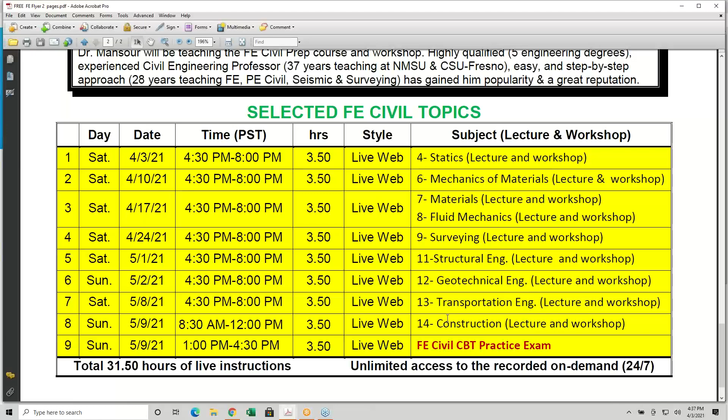Since you enrolled today with this ID, it's only one ID for all the sessions. So basically, I'm going to finish all these chapters. I finished already 4 or 5 of them, and I will ask the production company to coil these 9 chapters for me, and I will be glad to mail it to you for free. I'm not going to charge you because the course is free, so I'm going to send you the material also for free. Can I send you a PDF?

My lawyer has always advised me for the last 28 years, since I'm still teaching the PE and the FE, not to send a PDF because it can cause a problem, and it did cause a problem one time, by the way, and I don't like this to happen again. So I prefer to mail it and pay for the cost of postage instead of sending you a PDF. And this is my preference.

Okay, so let us talk about the exam, but if you can give me just 2 minutes, I will be back. I'll be back to bring the material, or make it 5 to be reasonable. Okay. The FE. Let me get the camera. I believe I lost the camera for some reason. Let me get the camera again because I need it. Let me convert this right now so I can load it on the Google Drive. Converting. Too many things, and I don't know why I made it back to back, but that's fine.

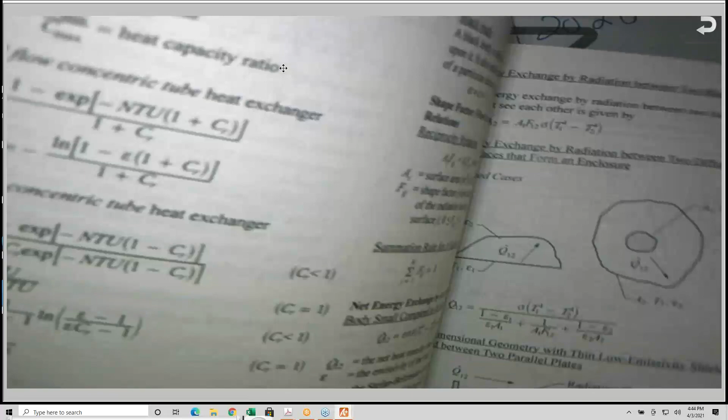The 9.5, like the previous editions, used to be 2 columns side by side. And when I started preparing my book, I said, why 2 columns? 2 columns will be difficult. Let me make my book only 1 column when I reproduce the material from their book. 1 column per page is much better, and this is what they did, which I'm glad they did.

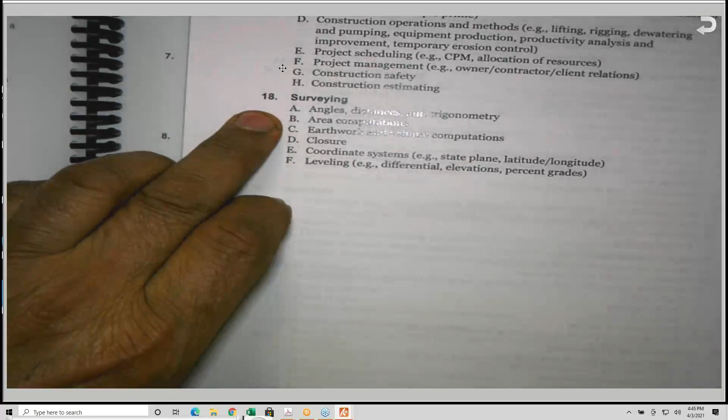So if we go to the FE civil, instead of dealing with 18 subjects as in the past, right now we are dealing with 14. But what they did, they merged them. So the FE civil, let me show it to you. In the past it used to be 18. Here it is. So the FE civil in the previous one consists of 18 sections: math, probability and statistics, and so on, all the way to the end, where the last section was surveying, section 18 or chapter 18 if you like to call it. Right now, they said, no, we're going to make it only 14, which is good.

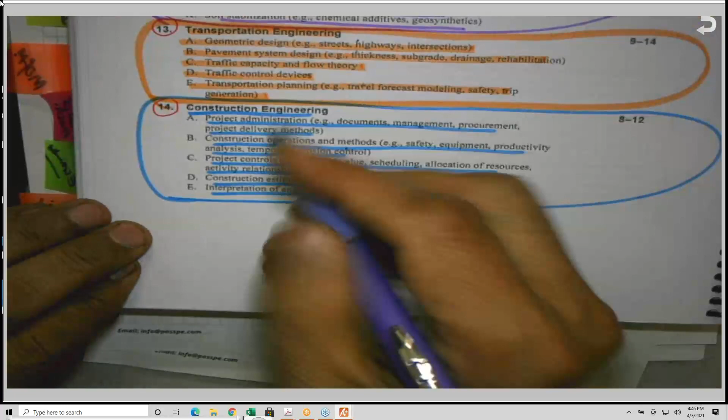So in this case, we are going to go to the civil portion, which I marked here. And this is how I arranged my book, and this is how we are going to see the material. For example, here you'll find that the first section is mathematics and statistics, from 8 to 12 problems. And they give us the topics: ethics and professional practice, engineering economics, statics, and so on, until chapter 14, the last chapter, which is construction engineering. And the previous chapters are transportation engineering, geotechnical engineering, structural engineering. So those are the topics included in the current exam specifications.

The way that I develop my books, either the PE or seismic or surveying or the FE now, I took these topics and tried to come up with very concise explanations and problems. Because I have a long history of writing these books. By the way, back in 1995, Michael Lindeburg of PPI, very famous, this was my first trial with him. It used to be EIT, Engineer in Training. So I wrote 5 chapters for him, but I wrote it the way he wanted.

Shahin Mansour, PhD, California Department of Transportation, which is Caltrans. As all of you know, I retired. Just last December, or January 1st was my first day, but I went back to Fresno State. I'm teaching seismic, and some of you may be taking the class with me right now. I was teaching timber design last semester, and I will teach it again. So I'm between Caltrans and Fresno State, back and forth, but I try to keep myself busy and help as much as I can.

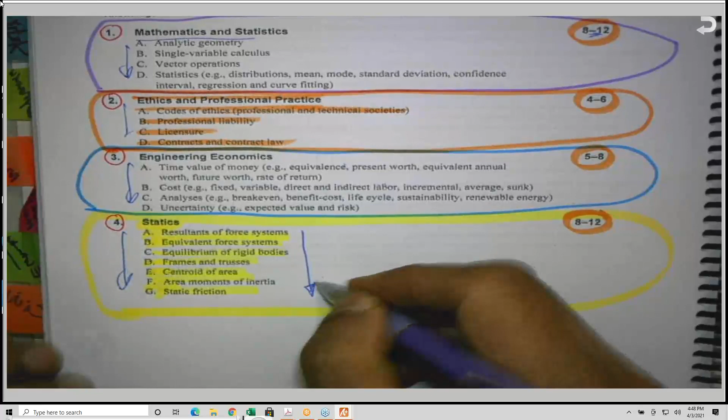So statics is the first chapter that you will see. Okay, statics, lecture and workshop. When you receive my book, or my concise version of it, you'll find only 9 chapters, or the 9 topics that we covered here. Topic number 4 — I put the order, by the way, as shown in the NCEES. This chapter 4 is statics.

I skipped it. Mechanics of materials, fluid mechanics, surveying. I skipped water resources and environmental, and I jumped onto structural engineering, geotechnical engineering, transportation engineering, and construction engineering. So these chapters are in good shape, so I said I can wrap them up. They are not final yet, but at least I can provide you with these 9 chapters in the form of a book like this, and it will be a good tool to help you prepare for the exam.

As far as the books available in the market, I'm familiar with all of them. For the last 28 years I've been doing this, so I am collecting books. I respect every book, and there are some good books available in the market. You are very welcome to purchase anything, but I will do my best to cover as much as I can.

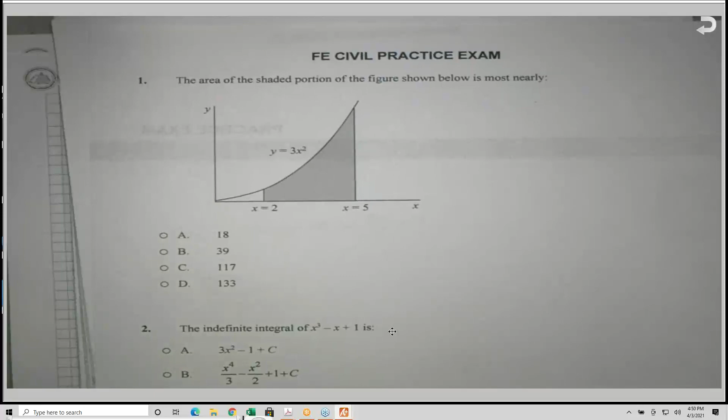For example, this is a question related to math. The area of the shaded portion is given, and they give us some sample problems, and they provide solutions at the end of this booklet. I'm using this as a guideline. For example, this is the first question related to statics, problem number 18. The magnitude in Newtons of the resultant of the three coplanar forces A, B, and C is most nearly, and they give us 4 possible answers. So this is resolving forces and the resultant and so on.

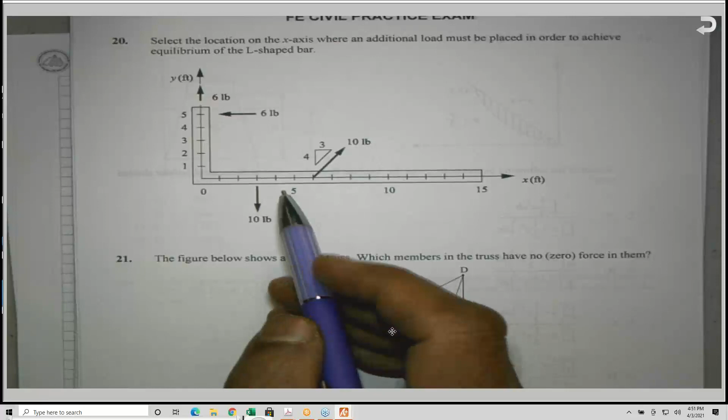If you flip the page, you will find free body diagrams. We need to know how to draw free body diagrams. The following one gives you this shape with some forces, and asks you to select the location on the x-axis where an additional load must be placed in order to achieve equilibrium of this L shape. We'll talk about that. Trusses are something very important. It asks which members in the truss have no force, which we call a zero force member. We need to know that. So this is statics.

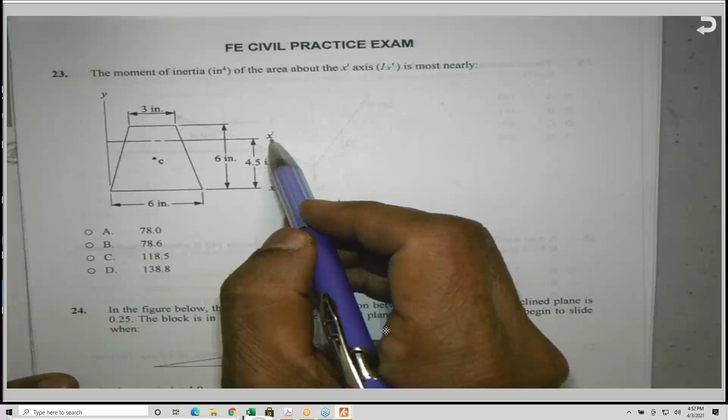If you flip the page, you will find the centroid. For this given shaded area, we need to look at the centroid: which expression gives the distance from the y-axis to the centroid. They give you the expression, and we need to know that. If you go to the second question, you will find the moment of inertia, or the second moment of area as we sometimes call it, of this area about the x prime axis is most nearly.

You will find that the x prime is parallel to the x axis, and there is a little dot here, and this is C. C stands for centroid, as you know, and we need to get the moment of inertia about x prime. We are going to use what is called the parallel axis theorem, so we need to know how to apply that. Friction, another section. So this is a statics problem.

If you flip the page, you will find that we have 3 forces, and it asks the magnitude of the resultant of these 3 forces. Up to here, question number 25, this is the end of the statics section. After that, they talk about dynamics and

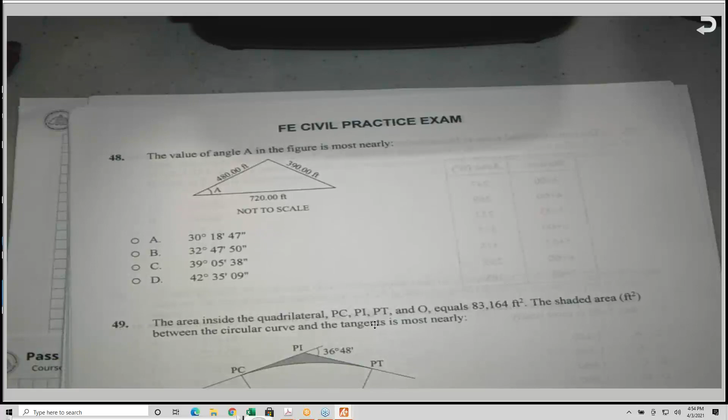steel, mechanics of materials, hydraulics and fluid mechanics, transportation: horizontal circular curve, radius, point of curvature, point of tangency, and PI, the point of intersection. Area: we're supposed to know how to do the area using 3 methods. We'll talk about that.

Prismoidal method, I just talked about it a few minutes ago. There is one method called the prismoidal. So when you read question number 50, for example, or whatever the number of the question on the actual exam, this will be on the right-hand side of the screen, and you need to do the calculations, and you pick the answer by clicking on the answer.

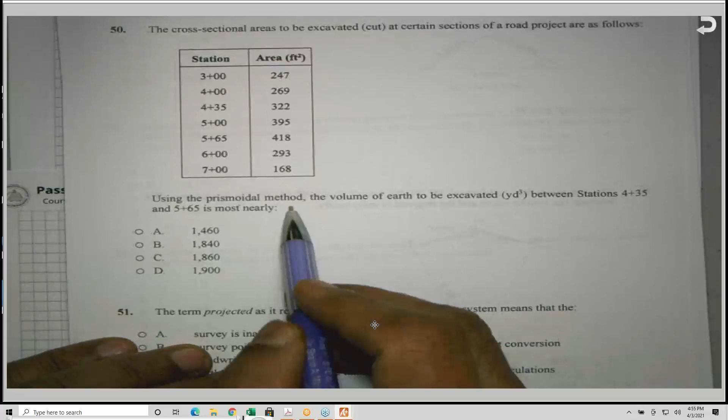So the cross-sectional areas to be excavated at certain sections of a road project are given, and it is asking, using the prismoidal method, the volume of earth to be excavated between station 435 and 565. So here is 435, where the area is given, and 565, most nearly. Here he specified a method. In this case, I have to use this method.

Your job will be this book, which is the FE Reference Handbook, which is, as I told you, available as a PDF. You can download it. But this book is for everybody, for mechanical and for civil, industrial, name it. You should know how to search for the prismoidal. And you should go to the equation, because you cannot memorize all the equations or the tables, the charts. But if I know where it is, I will be very quick.

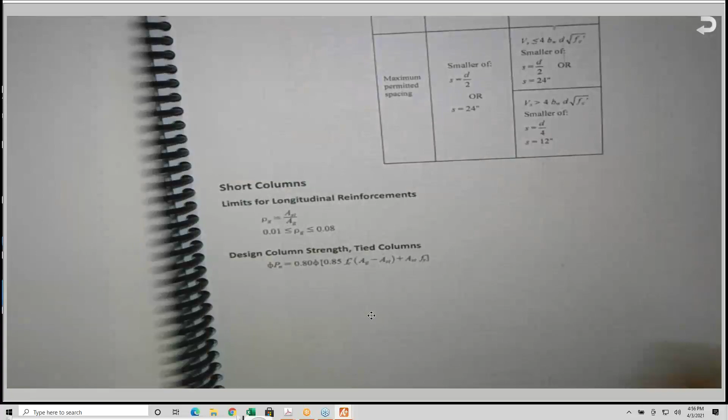So if you go to civil engineering, you will find that it starts, according to their book, with geotechnical. You will find that on page 258 and so on. And if you go to the transportation section, you will find there is one equation about the prismoidal, how to get the volume of the earthwork using the prismoidal. And let me see, I'm searching by hand, not searching by the PDF. Okay, this is water resources.

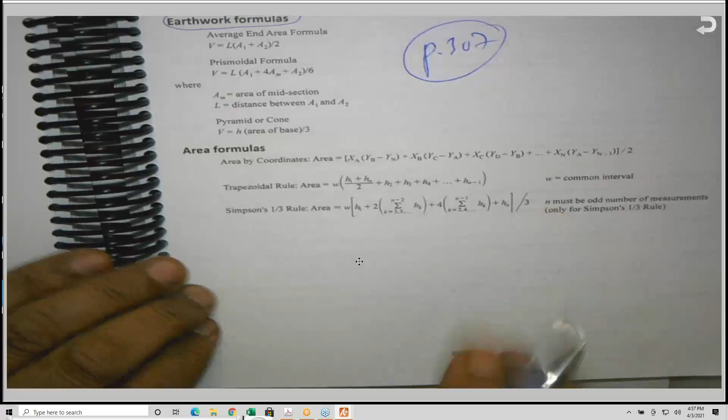Okay, and this is the horizontal and vertical curves, and the volume, it must be somewhere here, traffic safety, and earthwork formulas. This is on page 307, by the way, of this book. And here is the prismoidal formula. The volume is equal to L over 6 times (A1 plus 4 Am plus A2).

I was just covering this, by the way, for the civil breadth in chapter 8 of my book. You will find that the equations are the same. We're not going to reinvent the equations, but I put it in a tabulated form like this with some kind of illustration. Here it is: volume, prismoidal formula. The volume is equal to (A1 plus 4 Am plus A2) L over 6, and the 27 to convert cubic feet into cubic yards.

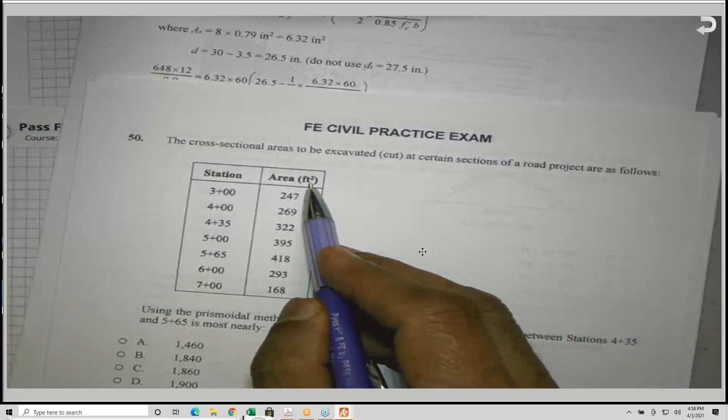Units are very, very important. In this question the area is given in square feet, but he needs the volume in cubic yards. So you have to divide by 27. That's why I included the 27, because there are 27 cubic feet in 1 cubic yard, as all of us know. And at the beginning of this book, it has some units and conversions, and we'll talk about this because we need to know that.

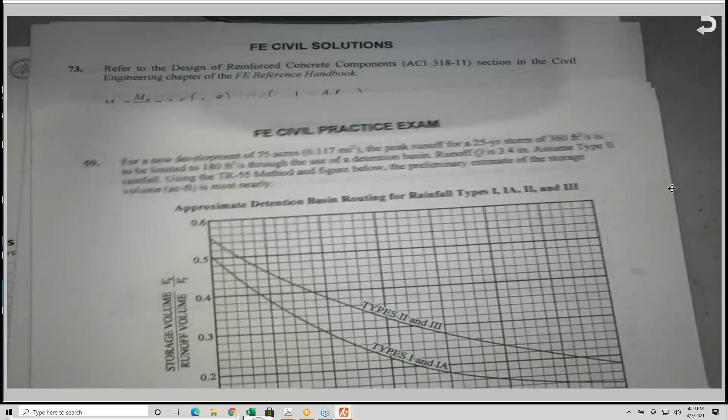So the point is, the moment you read a question, you should search for the keyword that will give you the equation, because you cannot remember every single equation, and we'll go over this. After that, we have some questions on surveying. This is hydraulics, pipes and flow. We have something like this, and it is asking the storage volume. And we are going to see how we can use this. Q is given or calculated. We are using something called the rational method, or another method specified, which is Q equals CIA.

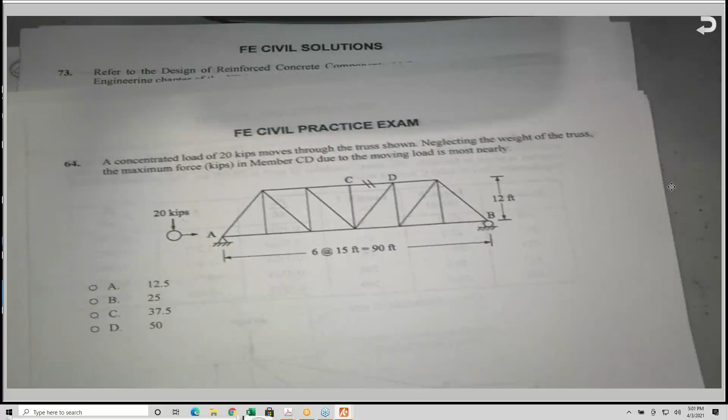We have one equation, we're going to see it. And you are lucky that he gave you all the parameters. You are not going to start it from scratch. And we will know that.

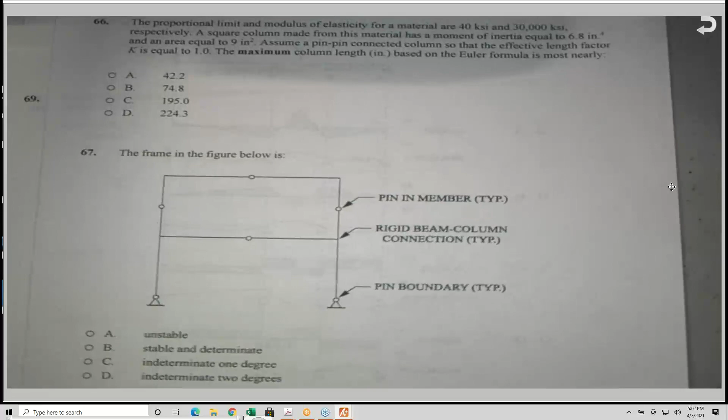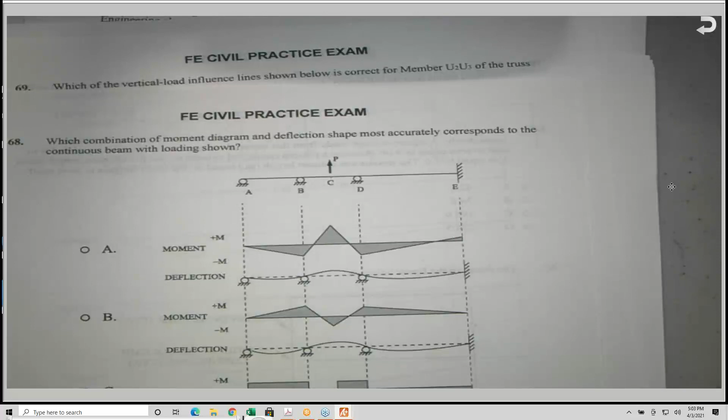And deflection calculations we will go over it. We need to select the proper answer if we know how to draw the influence line for a statically indeterminate beam, because this will give us a deflection. And the moment diagram, also we need to know how to draw the moment diagram.

This is another truss problem. Problem number 69 gives you a truss, and asks which of the vertical load influence lines shown is the one for member U2, U3. We'll talk about that. He gave you different influence lines, and we will see that.

Concrete beams, steel, this is a steel beam. This is a concrete beam, CE132. This is CE133, this is CE130 for those who took the class here at CSU Fresno. I taught this class for many, many years.

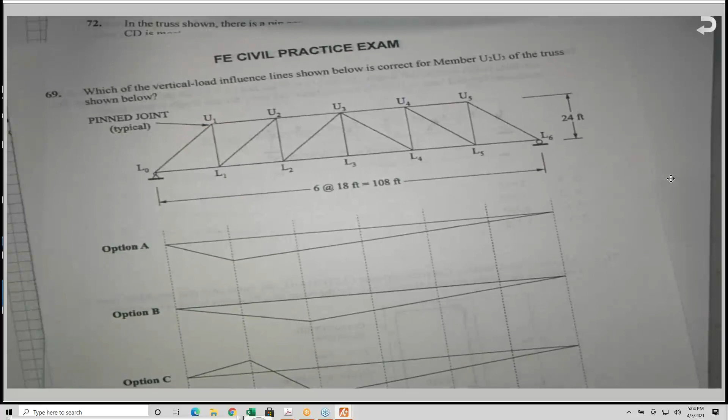Unfortunately, it is a very compacted class, not a fair class, but what can I do? I suggested something to Dr. Lalarde when he was the chairman, and I told him this class should be broken down into 2 classes at least, or 3: statically determinate, indeterminate 1, indeterminate 2. But nobody is willing to listen to me for some reason. I don't know, because I am Egyptian probably.

We need to know how to analyze trusses using the method of joints, method of sections, or the third method, which is called the cut and sum method. And I will teach that, and you will never forget it, okay? If you look at another concrete problem, okay, we need to know that.

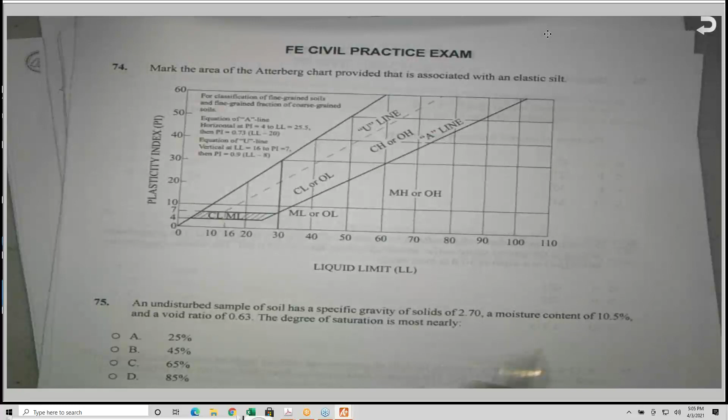Geotechnical or soil mechanics. Do you remember this chart called Atterberg? Professor Atterberg, he is a Swedish scientist, he came up with this chart. It's called the plasticity chart. Liquid limit and plastic limit, and the PI, which is the plasticity index. We will know how to use it.

A lot of problems, some of them conceptual questions, some of them have a drawing, some of them they don't. This is a vertical curve. Okay, a highway profile is shown.

G1 is given and G2 is given. This is a point of vertical curvature. This is a point of vertical intersection. This is a point of vertical tangency. G1 and G2, and we're asking, the minimum design length of the curve is most nearly. L is not given.

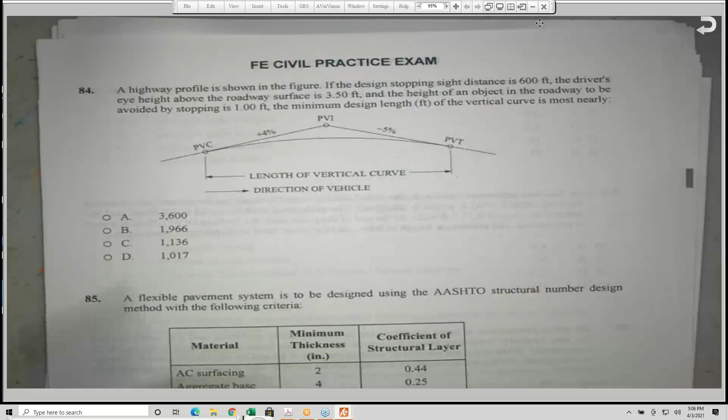Asking about the sight distance. The driver eye height is 3.5 feet, and the object is 1 foot. So if I'm driving and there is a mattress here on the road, 1 foot. AASHTO uses 2 feet, and I will explain this to you.

But we do have an equation for the stopping sight distance. I should come to a complete stop before I hit the mattress, or I hit the tire, or whatever object is on the road. So it's saying, what is the length of this curve to give me ample distance to come to this stopping sight distance, which is called SSD, by the way.

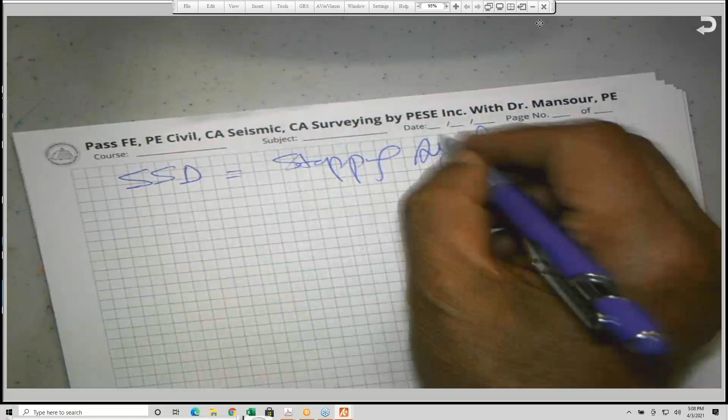SSD, SSD, we're going to see it twice. We use it as a stopping sight distance. Stopping sight distance. And we use it also,

which we'll cover here also, when we are talking about concrete. I believe they used to have a problem in concrete here, which is SSD. It stands for saturated and surface dry condition. A lot of abbreviations and a lot of notes. You'll get familiar with all these things.

AASHTO and CPI, all these things, we'll talk about all these things. Believe me, you will have a lot of fun. And engineering economics, for example.

The way that I'm going to teach this class, as I told you, we'll start with statics today.

I was planning to email you the PDF, but even my lawyer told me don't email any PDF. So probably I will listen to him, because I don't like to be in trouble again by somebody taking my PDF and doing something with it that causes a headache. So I will show you exactly what I did.

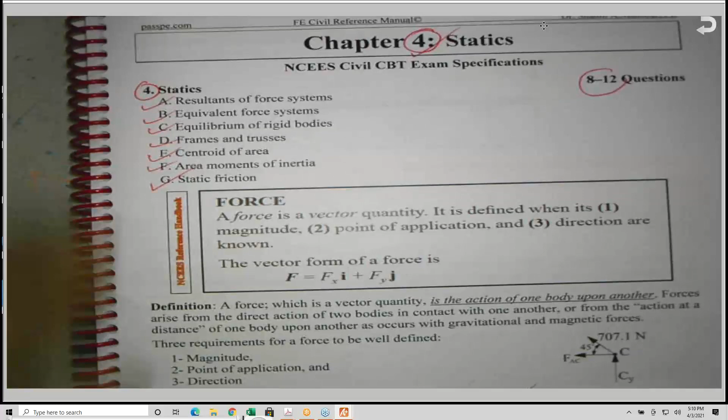I believe I have a first print here. For example, this is what you receive, 9 chapters in this format. So what I did, for example with chapter 4, which is statics, here are the topics. I copied this verbatim from the NCEES.

If you go to statics, let me see if I can locate it. Here it is, statics. Let me go to the description first, and after that I will go to this chapter. Here it is, the exam specifications as given in the NCEES. You will find that we have A, B, C, D, E, F, and G.

A, for example, is resultants of force systems, equivalent force systems, equilibrium of rigid bodies, frames and trusses, centroid, area moment of inertia, and static friction. Those are A through G, and I copied them.

And the number of possible questions on the exam, they put it between 8 and 12. So what I did, I went to their equations and topics, and I took one at a time.

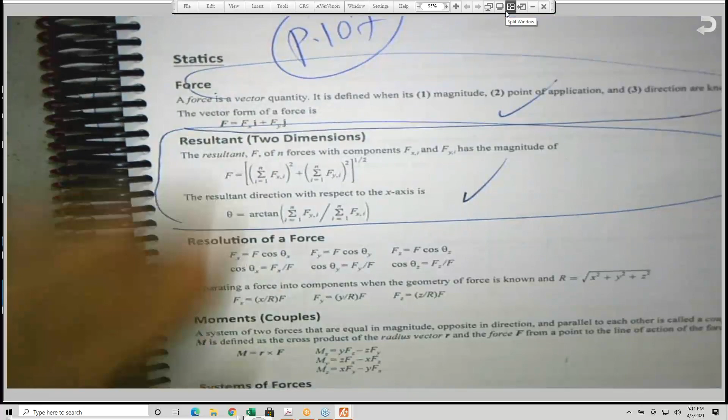For example, statics, here it is on page 107 if you have the book, by the way. Use the new book, which is the 10.0 — as I told you, this is the latest print.

So what I did, I took each one of these, because this is what you'll see on the exam. You are not going to see anything else. No other books can be taken to the exam site.

You're going to see this as a PDF on the left side of the screen. And if you have a question related to statics, you need to go to this page, searching for whatever I need. For example, if it's asking for the resultant, you have to search for resultant. It will take you to this page, because all these equations are listed there.

So I took each one of these, talked about it briefly, and provided problems. Because problems are like learning to swim — as I tell people, if you give me a couple of books about swimming with a lot of illustrations, telling me raise your left hand, raise your head above the water, name all these techniques, it doesn't matter how many books or videos I watch. If I don't jump into the swimming pool, I will never learn how to swim.

And this is the key here. In order to pass this exam, nothing is impossible. The passing rate is very high, and you can pass, because the people before me passed, I passed, and the engineers who came after me passed. It's just a matter of how many hours you are willing to put in. Nothing is for free — you have to study, sit and make mistakes, and solve problems. You should understand the concept very well.

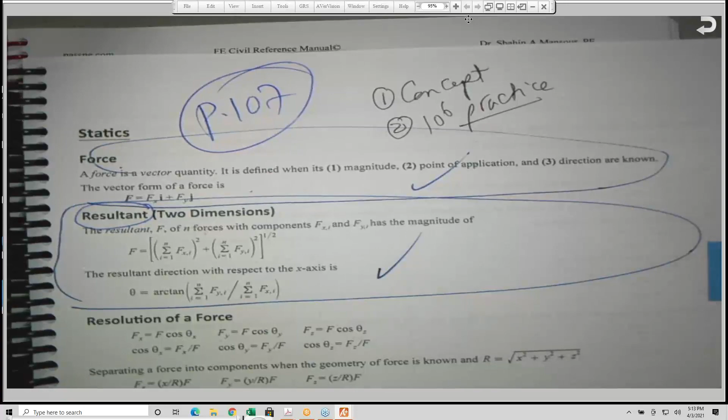Number 3, you must go to the exam with a strategy. Those are the 3 components I normally address.

For example, in the NCEES book, the practice exam has 110 questions. Some of them you can solve in 20 seconds. For example, look at question number 100 — they only provide 100 here, by the way. You will find it's asking a very simple question.

If you understand question number 100 — it gives you a drawing of a roadway cross section shown below, and asks what the arrow with a number indicates. Does this arrow and number indicate the thickness of the surface coating, the slope of the road at 3 inches per 10 feet across the slope, or that the edge of the roadway will receive a chamfer of a quarter inch, or a groove — if you understand how to draw cross sections and the difference between a cross slope and a slope.

You should answer it in 20 seconds. And we will learn that when we come to transportation and geometrics of the transportation.

So I would solve this problem, if I understand the subject very well, in 20 seconds. But if you go to a problem like this, the concrete problem...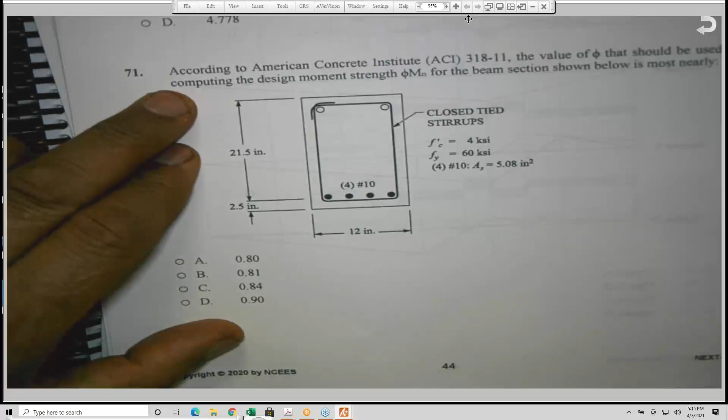Here it is, using the ACI code, the one we use, by the way - they are using an old one, I don't know why. The ACI code right now we have 2018, but currently we are using ACI 318 2014, but they're still using the old one, though they give you the equations anyhow, so it doesn't matter. Like the HCM, the Highway Capacity Manual, they are using an old one for some reason, I have no idea why, but it's not my problem or your problem. It is up to them, whatever references they are citing, we are going to follow them.

ACI, the value of phi that should be used in computing the moment phi M sub n - they give you some parameters here, the f sub c prime, f sub y, the dimensions, and the 4 number 10 bars. Probably it will take more time than the problem 100, the one I showed you, cross slope.

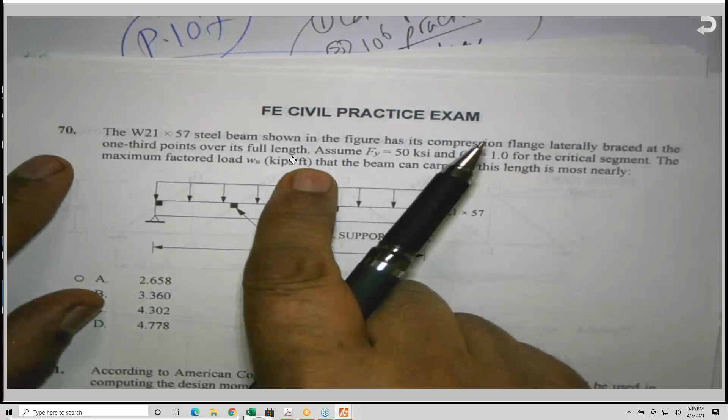So you have to be selective. For example, the problem on the same page, number 70, this is in the steel manual. Steel beam, F sub y is given, C sub b is given, and then it asks you - I need to go and look at some charts in order to be able to solve this problem.

So you have to be selective because you need to pass. I don't like to go to my wife and tell her, oh my God, my wife, I solved the most difficult problem in the exam. Yes honey, but you spent 15 minutes - you could've solved 3 or 4 other questions.

So you have to be, and this is based on your practice. If you practice enough - which I will say a million times, practice and practice, this is the key, the most important key among these 3 elements - you will be able to decide, oh, this problem will take too long, because you have 110 questions and 5.5 hours.

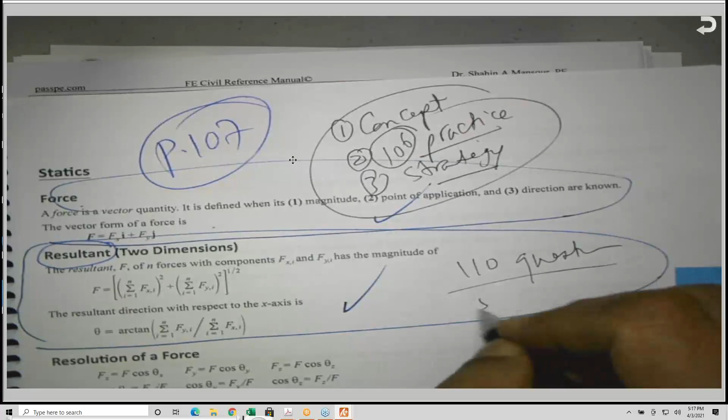So please do your best and I will do my best.

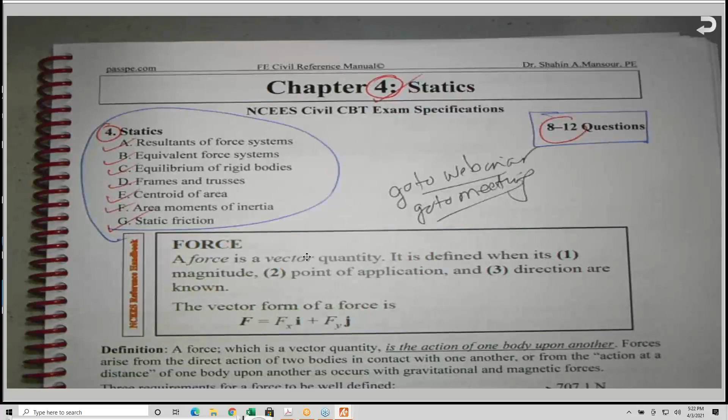The webinar company, because I'm using something called GoToWebinar and GoToMeeting. It's a very good company, GoToMeeting, okay? In fact, I'm using it also for my seismic and timber class, I was using this before Zoom was even invented. I prefer to use them and pay the money for that. I told the school I'm willing to pay, and I'm using my system. It's much easier, I like it, and it's very powerful compared to the others, from my point of view, okay? So anyhow, you are very welcome to attend or not to attend.

This is your decision. So you are very welcome to raise your hand. You have a control panel in front of you. You can raise your hand. The moment you raise your hand, I will be able to see your hand and who wants to talk, and I can allow you to speak out. When you speak out, everybody will hear you. So you have to be careful, okay?

So if you don't have a mic, or we have a problem with the audio, you are very welcome to write a question in the question area. For example, one of you wrote a question. Let me read the question first, okay? This is a very good class. You are very welcome. Thank you very much. Okay, but somebody is raising the hand. Let me see who is raising the hand. Let us go to Badr.

Hi, Badr. How are you? Hello, doctor. How are you? I'm fine. You are in New York or New Jersey? Is this correct? New Jersey. Yeah. How is the weather over there today? It's cold somehow. Cold. Do you have snow? No. Okay, good. So now you can study without snow. No problem.

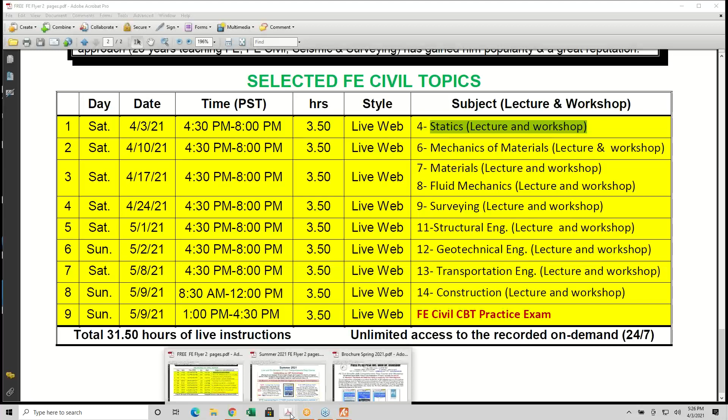So look at the material that you will receive from me, how I arranged it and prepared it and how we are going to handle this. And you are very welcome to email me with any question. I will do my best. I am extremely busy, this is my biggest problem, but it's not your problem, it's my problem. Let me just have a sip of water because I've been talking since 8:30 this morning for the PE.

So as I told you, this is what I took from the NCEES, and I put something here to indicate that. If you go to the NCEES, you will see this. This is the actual document. Force. A force is a vector quantity. It is defined when its magnitude, point of application, and direction are known. The vector form of a force is given as F = Fx i + Fy j.

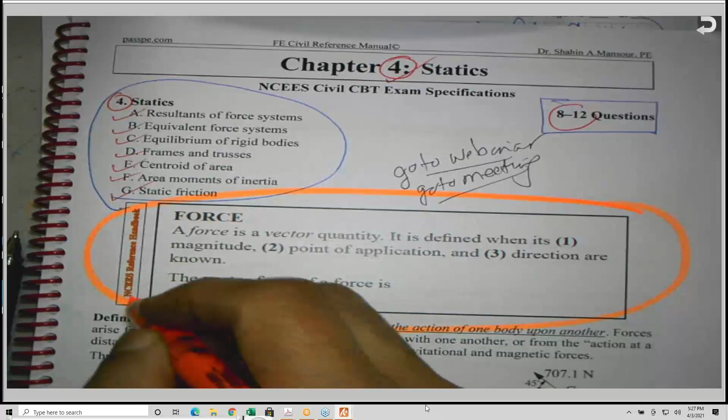This is the first paragraph I took from the NCEES and I put it in a box. This is what you will see on the exam. I tried to make it a little bigger, and I indicated on the side that this is from the NCEES FE Reference Handbook, verbatim, I did not change it. So this is not my Egyptian English. A force is a vector quantity, defined when its magnitude, point of application, and direction are known. My job right now is to translate this English into English.

What is a force? A force, which is a vector quantity, is defined as the action of one body on another. So I tried to clarify the definition. Right now, this is a book supported by a table. If I push this book down by my hand, I am applying a force. This is the action of one body on another body.

And a little bit more: three requirements are required. Magnitude, point of application, direction. The same three things mentioned here, 1, 2, 3. This is the situation in figure 4.1. I have 707 Newtons at 45 degrees. I have a force. I have a reaction. These three forces are meeting at a common point.

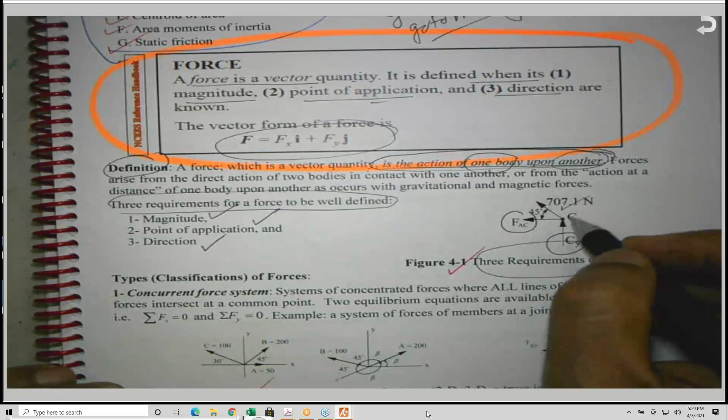This kind of force system has a name. You cover this in CE20, for those who took the class, I taught CE20 I don't know how many times, or whatever numbering system in your school. Let us talk about forces and classify them. The types of forces. The first one is the concurrent force system.

What's a concurrent force system? A system of forces meeting at a common point, like this, or this, or a 3D. This is a 2D; 2D means two-dimensional, X and Y. For 3D, I add Z: X, Y and Z. This we call a concurrent force system. The definition: systems of concentrated forces where the lines of action of all forces intersect at a common point. And I give you examples.

Where we are using the sum of the forces in the X direction and sum of the forces in the Y direction must be equal 0. This is one of the equilibrium equations, and this is another equilibrium equation. And you will say that, wait a second, equilibrium equations are 3.

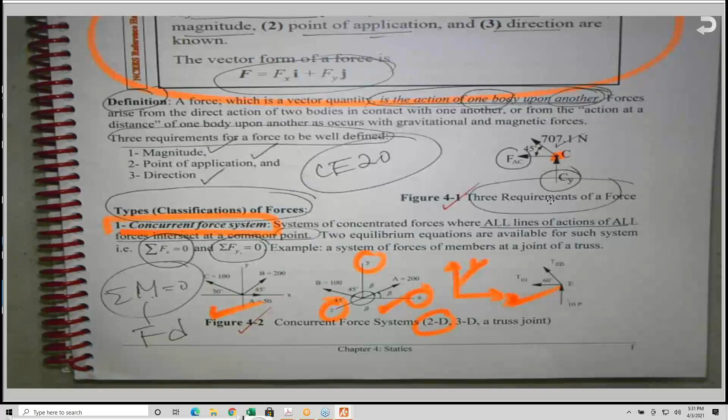So this is why, if you look at this, for a 2D system in the NCEES, as I put here, they are putting I and J. What happened to the K? Because if you remember, this is X, this is Y, and this is Z. They assign a unit vector, they call it I. And a unit vector, call it J. And a unit vector, call it K. I is along the X, J along the Y, K along the Z.

This is the notation that your grandfather and my grandfather agreed upon. Don't change it, please. I cannot say K will go with X now, because your grandfather will be really upset and my grandfather will be extremely upset. This is the standard notation. And as you can see, this I is boldface. Why? Because this is a vector quantity, not a scalar quantity.

In textbooks, there are 2 ways to express a vector. Either make it boldface like this, or put an arrow on top of it to indicate that this is a vector quantity. They found the boldface is much easier instead of putting an arrow, because quantities are either scalar quantities or vector quantities. Any quantity we use in our life is either scalar or vector. So for the vector quantity, we put an arrow on top of it, or make it boldface like I just mentioned. And this is what they did here, by the way.

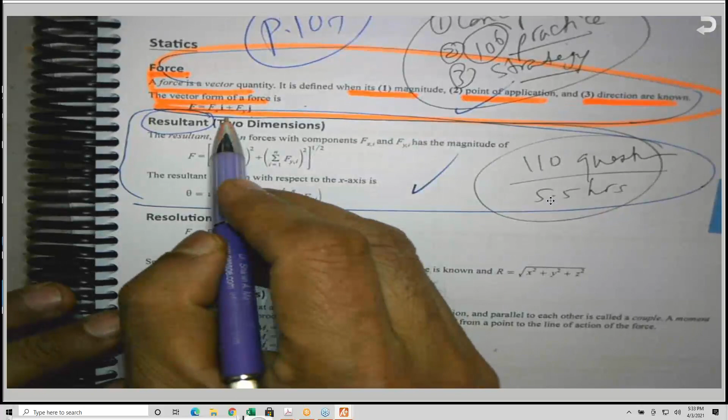You can see in the original document, this is the NCEES. I hope that all of you can print it, but this book is too thick. How many pages is it? It is 494. Obviously, printing it is costly. If you purchase it, I believe the NCEES sells it for $25 or 30, but you have to pay shipping and handling and wait for it. Or you can print only selected topics. If you can print only the selected topics, this will be the best.

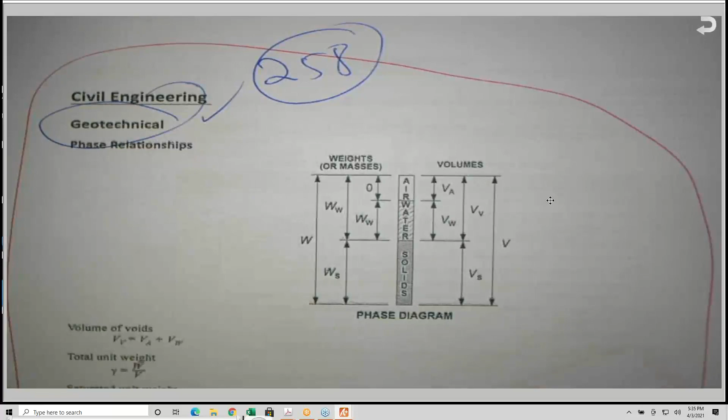What topics do you need to print? The 14 topics listed under the civil section, not in the civil section. For example, statics is not in the civil. Civil is all the way at the end here, starting on page 258. I can send you an email telling you what pages you need to print. They group them, mechanical and industrial, to make it easy. But some subjects are for everybody: engineering mathematics, engineering economy, material science, name it.

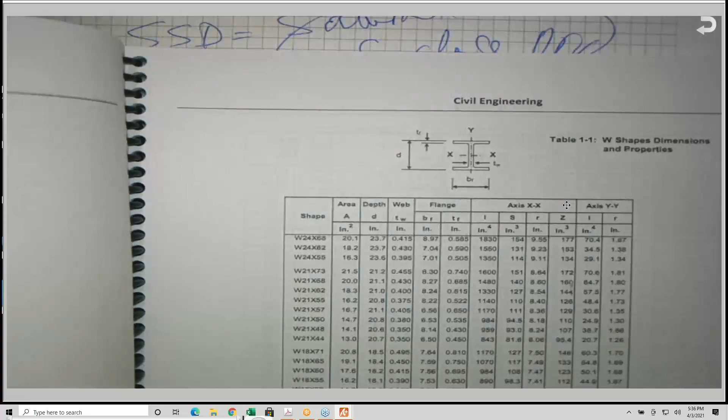Dynamics and statics depend on your discipline, but for civil engineering they put all the subjects only required for civil, like geotechnical, which is a very large section, and soil classification. After that, you will find structural analysis on page 267, and after that, structural design, concrete and steel, transportation, water, hydraulics and hydrology, until latitude and departures.

Environmental engineering is different; we're not covering environment. The civil section ends on page 308 with construction, which, if you remember, was chapter 14. I have 3 books on construction for the PE, but this is a very simple and concise section, and we will go over it. For example, AASHTO equations for pavement design. Here it is, highway pavement design.

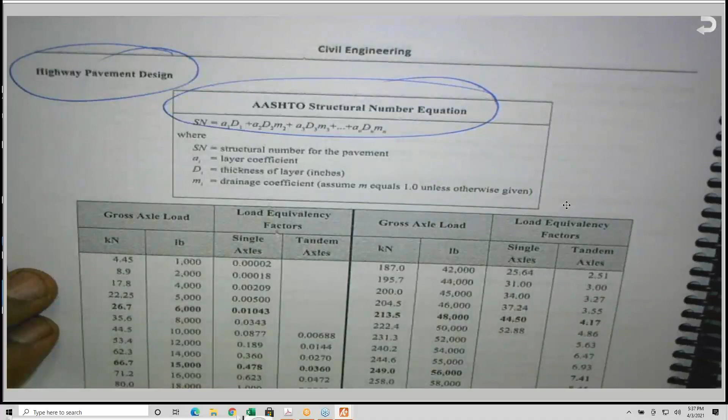And we have something that's called LEF. They produce the LEF for you. Load equivalency factor, and we will know that. For those who took CE 150 and 151, they know that. Anyhow, so you don't have to print the entire book, okay?

In my book, you will find that what you need from the NCEES is here, but it's not complete yet, okay? You will get the 9 chapters first, but for those who are going to take the exam soon, you need to download the entire book, because you need to know what is in the NCEES reference book. Because if you don't know the equations and the tables and the charts and how to use them and where they are located, it will be very difficult to pass.

Because you don't have any other sources or any material that you are allowed to take with you to the exam. And I'm sure that you are familiar with all this. I'm just saying this for some of you who are new and did not go through this process. So I need to make everybody aware of this.

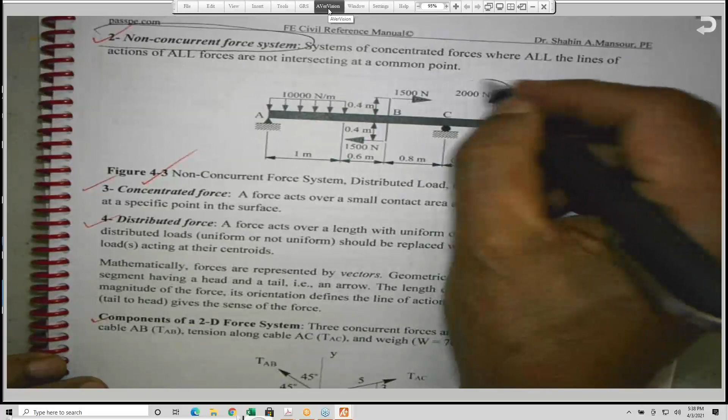Going back to the concurrent force system. So if you flip the page, you will find that I have the second group, non-concurrent force systems. I have a concentrated load here. I have 2 forces of equal magnitude, opposite direction. I have a distributed load, concentrated load. So they are not meeting at a common point. This load is going to be substituted by a single load here. This will be a moment, another load here, reactions, name it.

So here, the 3 available equations: sigma force X equals 0, sigma force Y equals 0, sigma moment equals 0. All 3 equilibrium equations for 2D. Is this 2D? How do I know that? Here it is in the plane of the paper, X and Y. So this is a non-concurrent force system: distributed load, concentrated and couple.

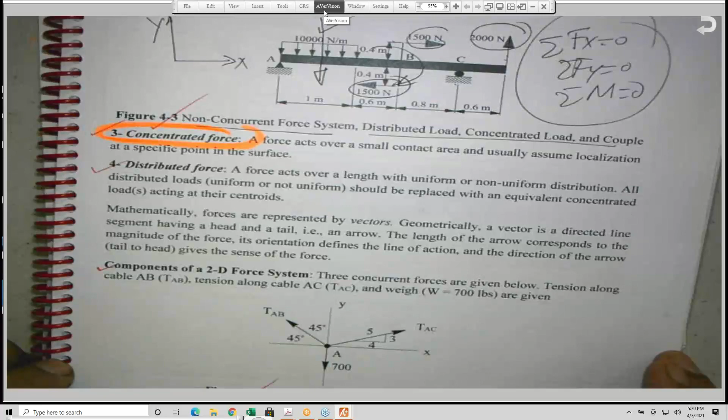The third category, concentrated forces. Forces could be concentrated or distributed. The concentrated one, we assume it to be acting over a point. A force acting over a small contact area, and we usually assume it to be a point, like the tire of your car. When we analyze the tire and the load coming to the pavement, I know there is a contact surface between the tire and the pavement, but for simplicity, we make it a concentrated load acting over a point.

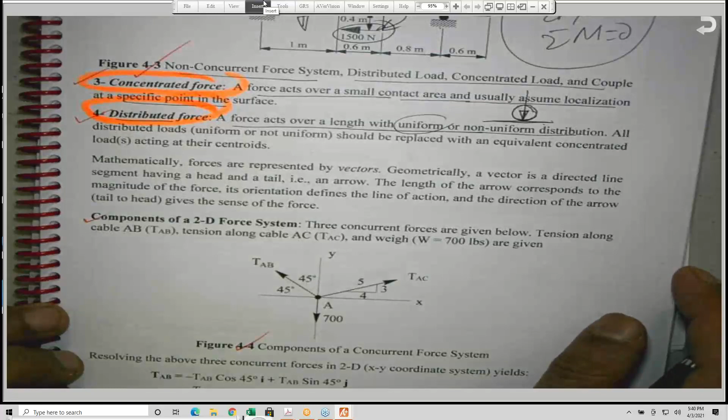But this is a distributed load, the second type. It is a force acting over a length, either uniform or non-uniform. We are going to see this in just a minute. So how can we resolve or handle a 2D system? So this is X and Y, so this is 2D. I give you a force here, or a tension here, and this is a 2D system, XY. And this is a concurrent force system, by the way, a concurrent force system in 2D.

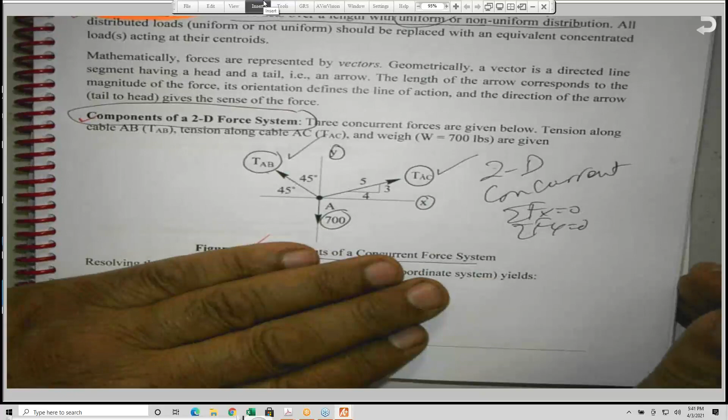How many unknowns here? I have the tension along AC and the tension along AB. How many available equations? This is 2D, and it is concurrent. How many available equations, do you remember? Sigma force X equals 0 and sigma force Y equals 0. The moment equation does not exist. Can I solve it? I look at the number of unknowns and the number of available equations.

If the number of unknowns and the number of available equations are equal, I can solve it. It's called statically determinate. And I need you to know that, and we are going to see this. So systems are either statically determinate, where the number of unknowns equals the number of equilibrium equations. Plus, by the way, we have something called conditional equations, and we are going to talk about this later on.

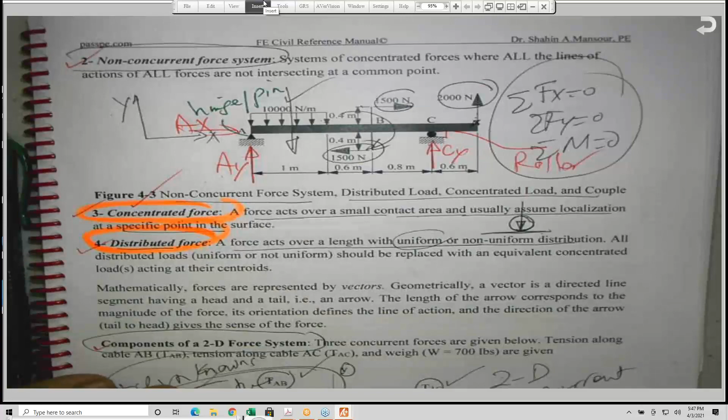How many available equations? This is a 2D system. I have 1, 2, 3. The number of unknowns equals the number of available equations, so it is a solvable system, it is statically determinate. And we are going to solve this. The other group is statically indeterminate.

I have a cantilever beam like this. And this cantilever beam is carrying, for example, a concentrated load P of 10 kips. And it has L of 8 feet, for example. This beam here, as is right now, is statically determinate. Why? Because the fixed end has 3 unknowns. If this is A and this is B, I have A sub y, A sub x, and the moment at A. How many unknowns? 1, 2, 3. Is this 2D? Yes. How many available equations? 3.

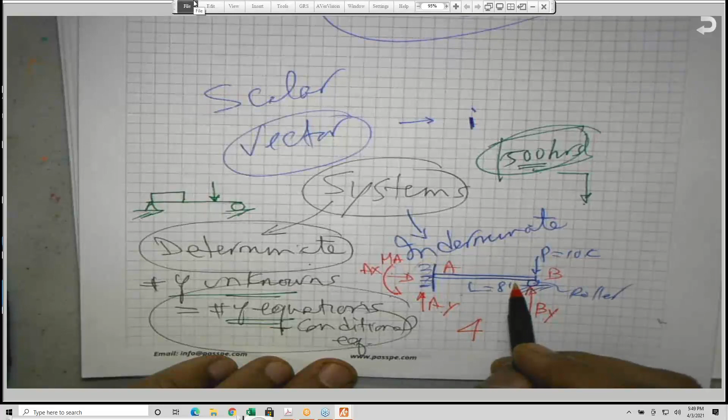But if I come and add another support here, a roller support, what will happen? Now by putting this, I am generating another reaction, which is B sub y. So the number of unknowns, my friend, changed. 1, 2, 3, 4. Some of them could be 0, but still they are unknowns. So 4 unknowns. How many available equations? It's still 2D, 3 equations.

So this system is called statically indeterminate to the first degree. The degree of indeterminacy is the difference between the number of unknowns and the number of available equations. 4 minus 3 is 1. So this is statically indeterminate to the first degree. And we will handle that. How can we do that?

This is system number 1, statically determinate, which is the easiest one. Is system number 2 statically indeterminate?

Let me remove this 500 hours because maybe some of you got upset, thinking Dr. Mansour is going to ask you to study forever. No, not forever, everything has a beginning and an end. If you decide today is the first day for the FE, just do it as soon as possible, the sooner the better. There is a statement I always repeat with our friends who've been taking the PE for many years, 30 years or so.

Do you know Benjamin Franklin? Who's Benjamin Franklin, by the way? Let me see if I have money with me. Sometimes I carry money, don't say Dr. Mansour always carries money, no. Who is this guy? This is 100, I'm not carrying the dollar with me, oh my God, Benjamin, who is this? I believe this is Benjamin Franklin, yeah, this is him. Do you know who Benjamin Franklin is? This is on the $100 bill, search it, Google it, I'm sure you're familiar with this, you have history better than me.

But Benjamin Franklin has a statement, I always mention it in my emails. If you receive an email from me, you will see it. It's not to bother anybody, it's to encourage everybody, I'm here to help and encourage. Benjamin Franklin mentioned a very important statement: by failing to prepare, you are preparing to fail. Let me correct this, oh somebody's asking for my $100, oh my God no. So by failing to prepare, you are preparing to fail, a very important saying by Benjamin Franklin.

If I do not prepare myself for the exam, I'm sorry but I will go to the exam and fail. Don't say that by luck, the lottery will work for me. No, the lottery doesn't really work, you have to, nothing is for free. By failing to prepare, you are preparing to fail. You have to prepare yourself very well.

So the third one, I will answer you in just a minute. One of you is adding something here, you're very welcome to correct me, or if you feel that system number 3 is something we call unstable. The unstable case was mentioned, and you saw it today in one of the NCEES problems. Oops, I don't mean it, let me cancel, I'm sorry, let me get everything back. Okay, it seems there's one problem, and I have many problems related to this, we'll talk about it.

Let me see if I can locate it in 22 seconds, start counting from now. If I don't find it, I owe you a lunch, and if I do find it, you owe me a lunch. Deal? Deal. Okay, I got it. Did you count how many seconds? No. Okay, so here, problem number 67, if you have the book, this is the new one, not the old one.

The frame in the figure below: unstable, stable and determinate, indeterminate to the 1st degree, do you see the degree of indeterminacy, or indeterminate to the 2nd degree. I need to know the number of unknowns and the number of available equations, and this will lead me to the third case, which is unstable.

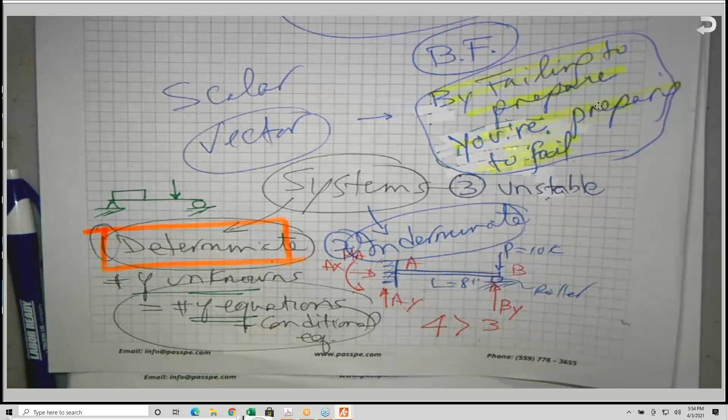System number 1, we call it statically determinate. System number 2, statically indeterminate. And the third one is the green one, oh my God, the green, you know the Green Party? There's a Green Party that runs for presidency. Okay, Green Party, what is statically unstable?

Do you remember this roller, which I told you has only one unknown that is perpendicular to the contact surface? Imagine you hired me, Dr. Mansour, to design a bridge for you, and I did this bridge for you. I told my friend I will build a very nice bridge for you: one roller here, and here is the river, with some water and some fish in it.

And I opened the day of the cutting the ribbon, and everybody is waiting. And here is the bridge.

And these two rollers here, how many unknowns do I have? If this is the beginning of the bridge and this is the end of the bridge, this is B sub y, and this is A sub y. Is this correct? Only one unknown.

So how many unknowns do I have? I have only two. How many available equations? There are three. This is a 2D system, so the number of unknowns is less than the number of available equations.

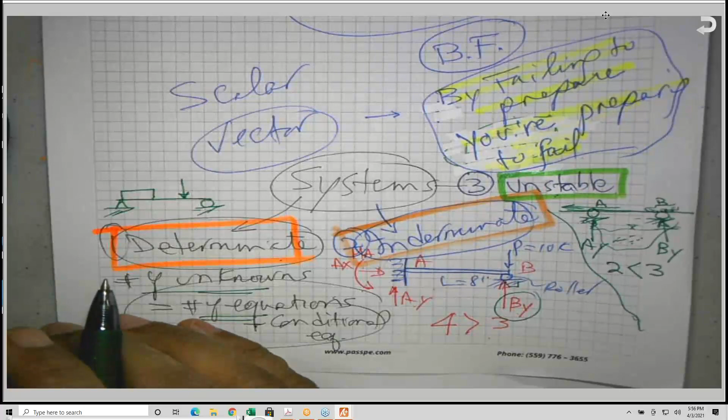There is no force or reaction to prevent this bridge from moving with the car or the vehicle, whatever it is, or a pedestrian. Somebody can push it, a kid can come here and push it. So it is unstable, and we study this. I'm sure in CE 130 they talked about instability, and we'll talk about that because there is one question we discussed.

So going back to that. I finished that.

A 2D system, two unknowns, and this could be a question. I believe I have it as a problem. I can find these two reactions, or these two tensions, or these two forces, whatever you'd like to call it, because I have two unknowns and two equations, a solvable system.

But when you have the number of unknowns exceeding the number of available equations, it's statically indeterminate, and we solve it also. But there must be some kind of techniques, and you will learn that. Oops, here it is, the camera sometimes.

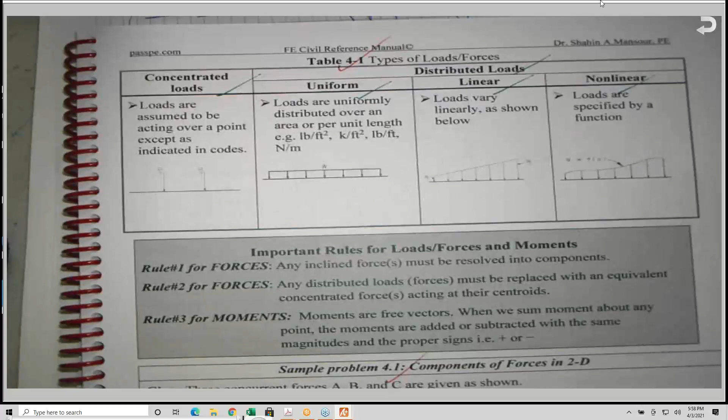This is a table of different types of loads: concentrated, distributed, uniform, linear, nonlinear. And you will find, in order to emphasize or clarify the concept, I add some stuff here. I call it rules.

I don't invent them, like I did not invent the knowledge in this booklet, by the way. It's just presenting the knowledge. So I don't invent anything. I'm just presenting the knowledge that I learned and the knowledge in the textbooks, with whatever copyright is required.

So important rules for loads, forces, and moments. I needed to remember that. Nobody will ask you to memorize it, we need to understand. So rule number one: any inclined force must be resolved into components. We are going to see this shortly. Any inclined force or slanted force, break it down into components, much easier.

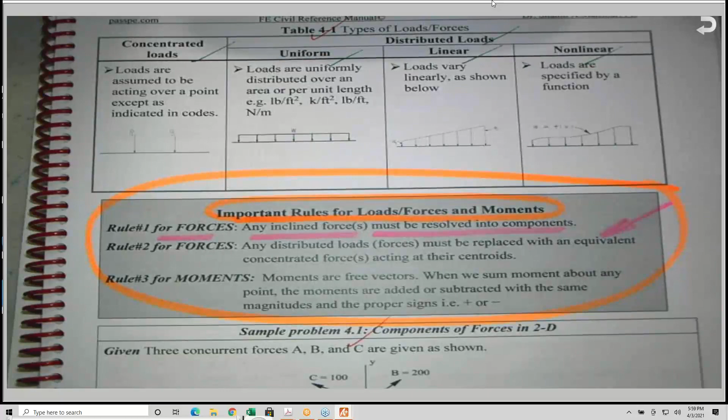If I have a force like this, F is equal to 8 kips, and this side is 4, and this side is 3, so this is 5. I can substitute this force by two components: one in the x direction, F sub x, which is equal to 8 over 5 times 4, and the one in the y direction, which is 8 times 3 divided by 5 — sine and cosine.

And we are going to see this shortly. By doing this, resolving forces into components, it becomes much easier to sum moments and find the unknowns. And you are going to see that.

The second rule: any distributed load or force must be replaced with an equivalent concentrated force acting at their... okay, sorry, everybody is calling me, okay.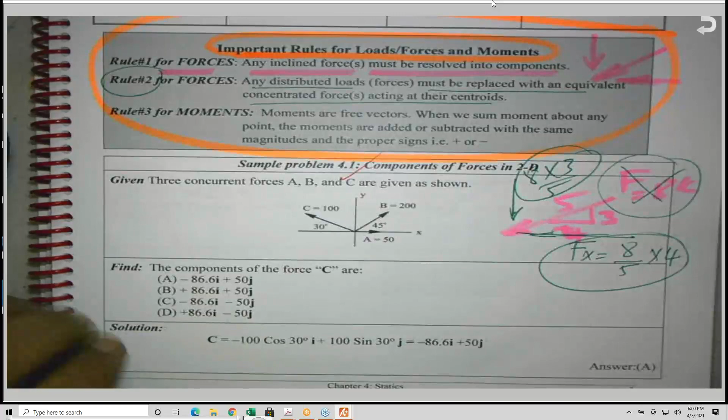So if you have a distributed load like this, acting on a cantilever beam. This beam here is 9 feet, and this load here increases linearly from 0 at the fixed end.

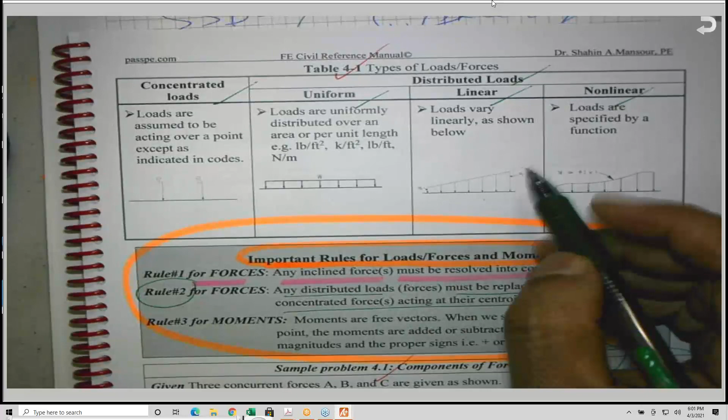This is fixed end, we use this symbol to indicate it's totally fixed. Okay, this is a shelf in your house or apartment, and you put all the books, the FE books, here, but for some reason the books at the end or edge of the shelf are heavier. And this here is 2 kips per foot, so the load is increasing linearly like this, triangular, from 0 to the maximum load intensity or force intensity, 2 kips per linear foot.

I will call this end A, and I will call this end B as in boy. We know we have 3 unknowns here: A sub y and A sub x, and we have a moment called M sub A. We call it the fixed end moment.

Imagine this is a shelf, and you put all the FE books on top of it. If these books create a moment, it's called a disturbing moment. If this shelf is not securely anchored into the wall, the books will fall down. The shelf will come down, and we have an accident like this, by the way, but a more complicated scenario.

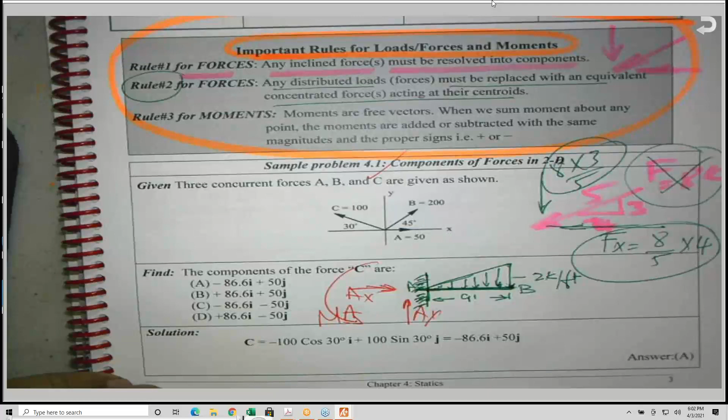I know you are tired, and it's already 6:02 Pacific Standard Time. Can you find these three unknowns for me? Can you give me what is A sub y, A sub x, and M sub A?

Okay, I need you to always check the calculators. The NCEES has a calculator policy. You need to check with NCEES to see what's allowed. They are available on my website to the best of my knowledge. I asked the webmaster to put it on my website. Let me see if he did it or not. I believe he did.

Where is my website? I do have one. Here it is, it has the Egyptian pyramid, by the way. So if you go down, or just go to NCEES.org, whatever is convenient for you. But I have it here at the bottom, I believe. I asked him to put it, and I hope that it's still there. Here it is, NCEES, click on it. It will take you to the NCEES. Here it is. This is the Bible for everything as far as rules, regulations, and exams.

And I need you to visit this website. I'm sure that when you enroll, you have to register with them. You have to accept the cookies, by the way. Okay, so you know all these things.

I don't know why I mentioned NCEES, for some reason. So now, oh yeah, about the calculator policy. Here it is. So you need to check with them to see what the examination registration requirements are. They have all these study materials and calculator policy. When you apply, all these things are here. It is full of knowledge. You need to stick with the rules and regulations stated here because they can ask you to leave the exam.

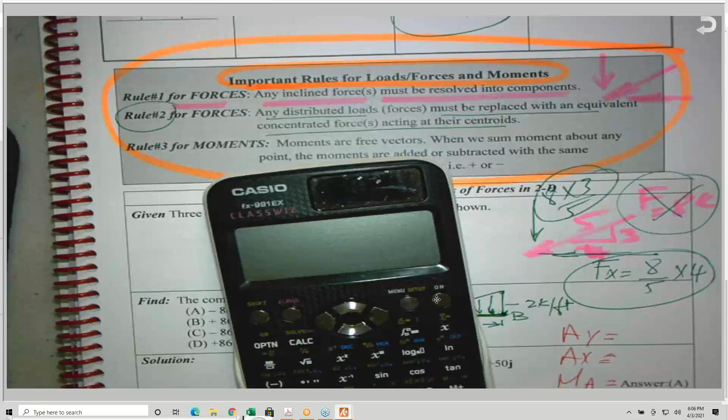Okay, this is the Casio FX. A lot of engineers like this FX 991EX, or the previous one. Where is the other one? I believe somewhere here. Here it is. Okay, so this is the other Casio FX 115 ES Plus. Many engineers prefer to use it for the FE. It is up to you. It does have equations, it does have matrices, it does have integration. All these things - try to do your best to learn it.

Okay, so my point is you have to decide which calculator you are going to take, and I prefer if you can take two - ask them if they can allow more than two. I'd prefer to take three, but if the maximum number is two, I will take two. Batteries should be brand new, because there is no room for error - you have to be well prepared. Don't take the risk.

Okay, so having said that, use these two calculators - whatever calculator you choose, TI, HP, whatever. Try to use it on a daily basis. If you are a student, use them. If you are working, use them. Because I need you to get familiar with all these functions and buttons, because it's very important.

So let me give you 2 minutes. Can you find these three unknowns? In 2 minutes, starting from now. Right now it's 6:08, at 6:10 I will stop.

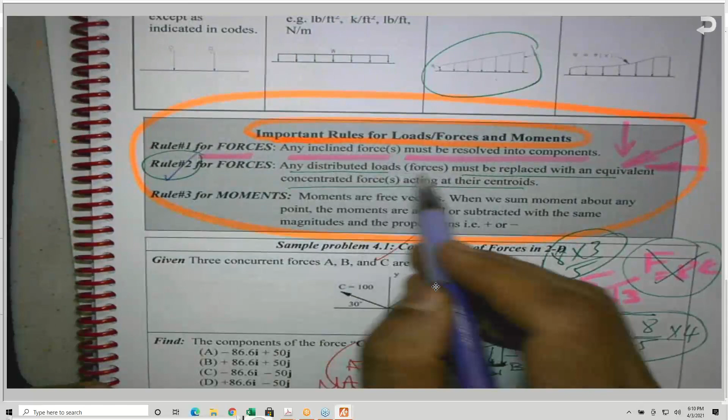Okay, time is up. So 3 unknowns. If you look to these rules, one of them, rule number 2, says that any distributed load or force must be replaced by a single concentrated or equivalent concentrated load acting at the centroid. This is just a simple triangle. So what is the area? The area is 1/2 base times height. So 1/2 times 2 times 9 will give you 9 kips.

Where is it located? At the centroid. Where is the centroid? At 1/3 and 2/3. So from here to here is 6 feet, and from here to here is 3 feet. And we should know that, for those who took statics. So for A sub y, if 9 kips are coming down, I have 9 kips going up, equilibrium. Sigma force y equals 0. A sub x is equal to 0, so A sub y is 9 kips.

What about the moment? There is some moment here, my friend. So it is 9 times 6, which is 54 kip-feet. Because I know this distributed load is substituted by a single concentrated load acting at the centroid, 1/3 from here or 2/3 from here. And we will see this. The NCEES, they have tables, and we're going to see these tables at the end, okay? And these tables are here.

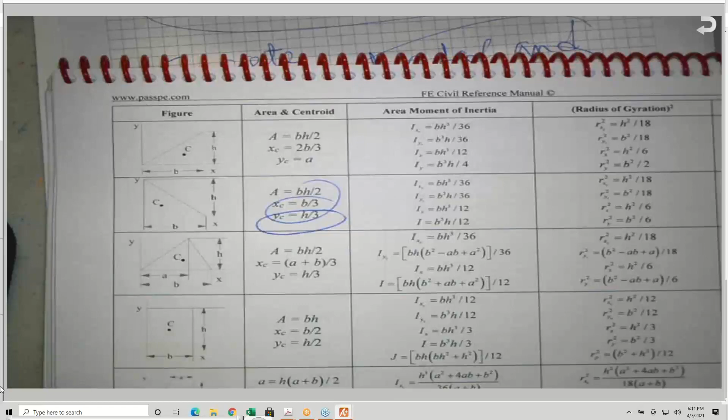Okay, I copied the tables also, and you will see all these tables. Here are the tables, and we'll go over them. Here are the tables in the NCEES, which is in the section of statics. Centroids, here it is, 1/3 and 2/3. But we should know that, okay? But in the exam, you don't have to. There is some information that should be stored in your computer, and we should be able to do it quickly, okay?

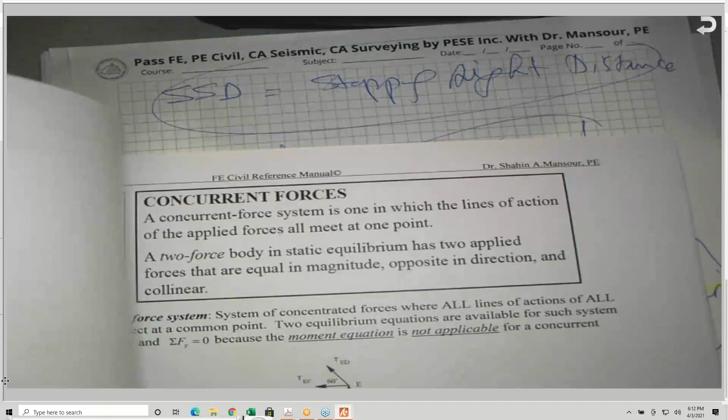I have problems. For example, this chapter here, the statics chapter, which is chapter 4, I have 28 problems here, under each section. This is the last section, for example, under concurrent forces. I explain it and give a problem. And after that, the tables they provided, I include the tables. And after that, I have additional practice problems, 4-1, 4-2. I have 9 problems. So 28 and 9 is about 37 problems related to statics only.

I believe if you understand these problems, and I'll try to find some additional problems like homework problems, if you understand the 37 problems and understand the concept, you should be able to solve the problems in statics. And as I told you, they are putting between 8 to 12 questions related to statics. So this is the way that I'm going to teach this course.

I will move, for example, to another problem, 4-2. I give you 3 concurrent forces. We need the components. Conceptual question, problem 43: which of the following is true for a concurrent force system? We need to read the 4 possible answers and pick the best answer. After that, I go to another section. What is this section? We're still on the first page of statics, okay? So you'll find that here it is.

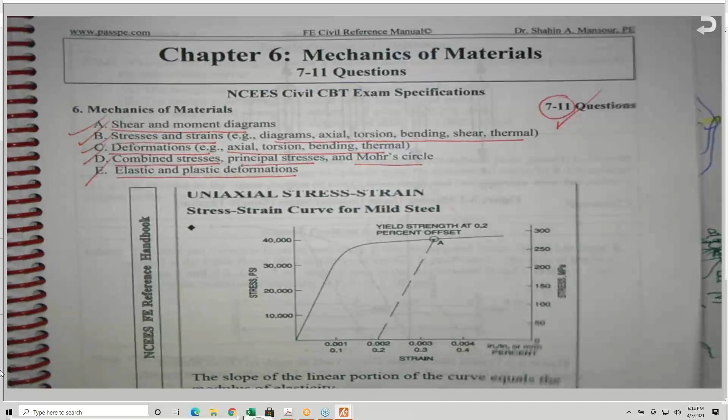I did all my best. I cannot claim anything other than my best. And mechanics of materials, for example, is another chapter. So I try to finish as much as I can.

I'm really, really busy. The intention was to help the daughters and sons of my friends, and I want to make it for free, because he offered me money and I told him no. If the course is not complete, I will not feel comfortable charging anything. So I will do it, and if I decide to offer the class, or if the book is ready by May 15, hopefully, just pray for me to stay healthy, and pray for you to stay healthy.